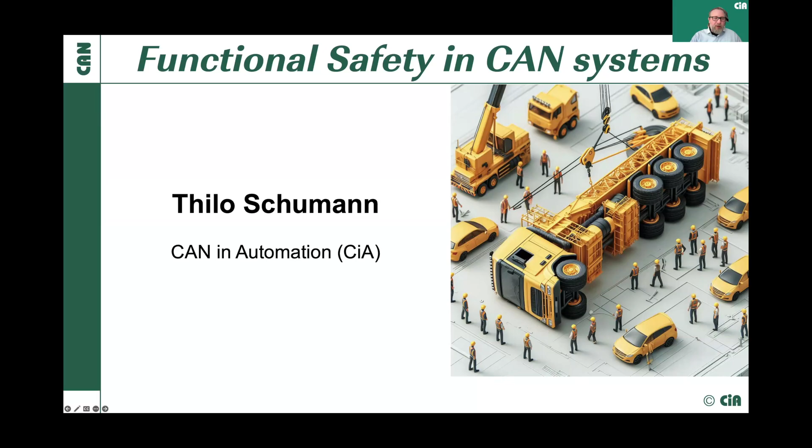I'll try to talk a little bit about functional safety in CAN-based systems, or functional safe communication. I'm working with CAN and CAN in Automation now for over 25 years and was involved in the standardization of many different things related to CAN and CANopen, especially also the CANopen Safety Protocol. And I'm also somehow a little related to the cybersecurity and the stuff Olaf is working on.

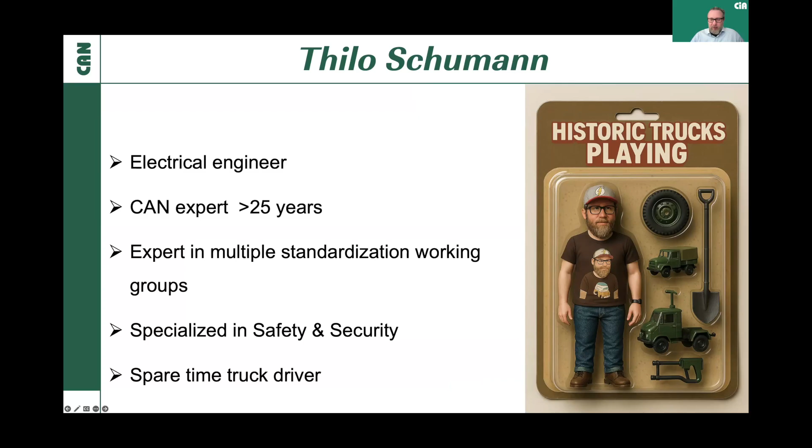But now I want to talk about functional safety. What does functional safety mean? At first, functional safety is a requirement in the European Union, which comes from the EU machine regulation. In the most current version, which is the regulation 2023/1230, which became active in 2023, with an ongoing period to be in full action in 2027.

In general, it is defined here that functional safety in the context of the EU machinery regulation refers to the safety that depends on the correct functioning of a control system. So at first, it's nothing complicated. It just means that it depends on the correct functioning of a control system. So basically, you don't have any bugs in there. And we know we don't have bugs in our system, so we are fine, hopefully. Oh, no. So it's basically to cover the problem that there are maybe failures, bugs, errors, something like that.

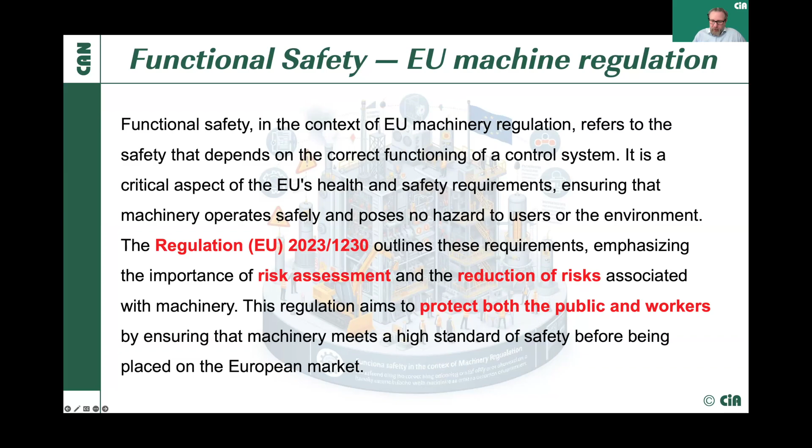And according to the definition, there are some key principles. The key principles of functional safety, particularly in the context of the new machinery regulation, encompass several crucial aspects. The machinery must be designed and constructed with safety as a paramount concern, incorporating necessary safeguards and features to prevent accidents. A thorough risk assessment is essential to identify potential hazards and ensure compliance with health and safety requirements. And the machinery must undergo rigorous testing and certification to verify that it meets established safety standards.

So it's always the same. You need to do a risk assessment, we have to reduce those risks, and we have to show in terms of testing and certification, and prove, that we have done that accordingly to fulfill those requirements. And we are always talking about machinery. I will also come back later to those definitions.

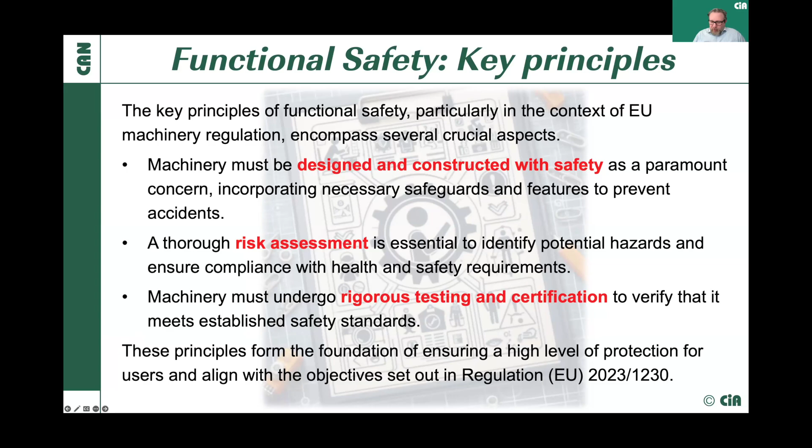Now let's go a little bit into the timeline of how functional safety evolved. Some of you may remember, at least in the European Union, we have had safety requirements established for decades now. One of the first standards to be applied was the EN 954, which was released in 1996. And only a few years later, we started with the development of CANopen Safety, to encourage and allow people to have a standard for applying those safety requirements into their systems and machinery.

Around that time, corresponding specifications were also released by IEC, the more or less well-known 61508 in the first edition, as well as the ISO 13849 in its first edition, which made some general definitions regarding safety requirements and functional safety. Shortly after, we also published CANopen Safety as our standard, CiA 304. And you see in the timeline that then, for some time, nothing really happened.

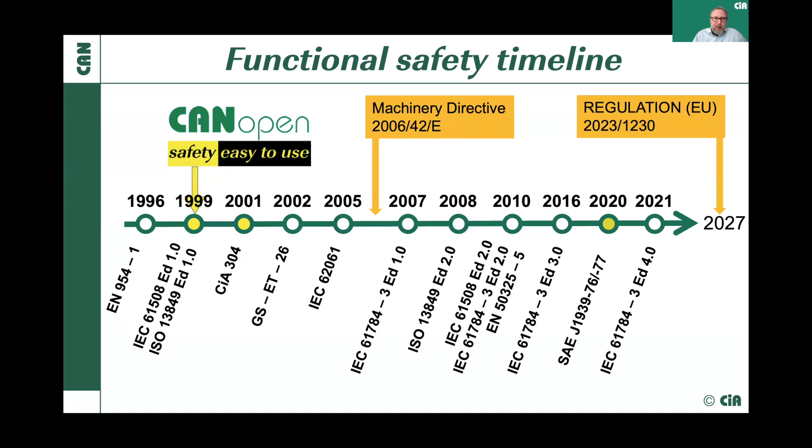So what does all that timeline mean related to CAN? I want to remind you, and we heard that already partly, we have 3 generations of CAN. We have the original CAN, or as we call it, CAN CC, released in 1986. That is what we use for CANopen, for example, or for J1939. We have CAN FD, released in 2012. For that, we have CANopen FD, and also J1939 has a representation and a mapping on CAN FD.

And just a few years back, we also released CAN XL in 2021. So I will now go through all the variations of CAN and what is available today, and talk a little bit about that. So first, here we see the three different frames, and mostly this general structure between those three generations of CAN remains the same, and that was a very important topic. We have a few additions made over time, of course, with the new requirements.

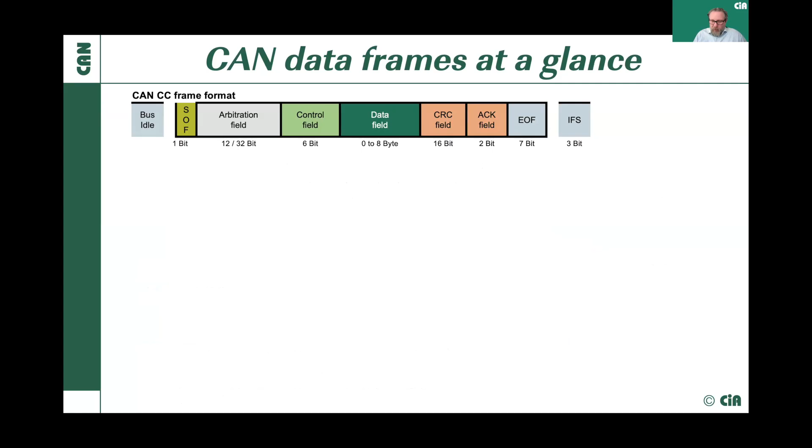And what we see here, and that is also the original idea, it is on the very same network. So we have no repeaters, we have no connected networks and so on. It's a single CAN-based network. And for that, we have, as I said, CANopen Safety defined as a European standard, and we have the SAE J1939 safety.

With a short look into the IEC definition for functional safe communication in industrial networks, IEC 61784-3, this standard lays down the fundamentals of functional safe communication in general in industrial networks, and more or less makes the definition on functional safe communication on what's called black channel. So I have certain repeaters and how all this comes together with the ISO layer.

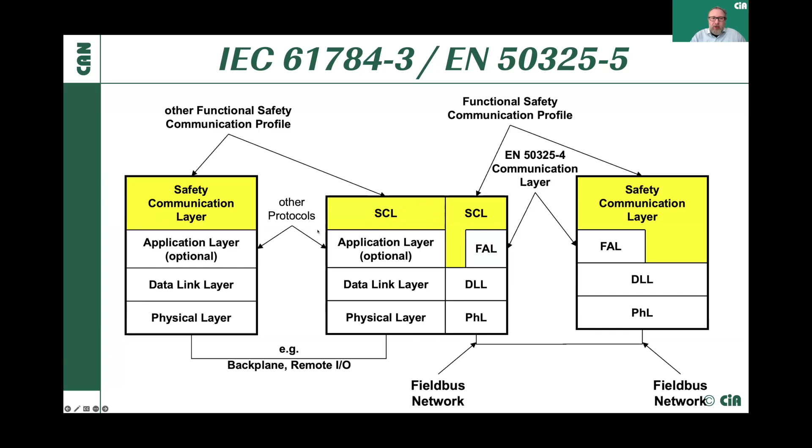If I put CANopen Safety in the mix, as I said already, we don't do it as a black channel network. We do it as what we call a white channel, or you may call it gray channel, because the whole CANopen Safety network needs to be a single network. There are no repeaters, no elements in between the devices that need to communicate with each other. And if we want to make communication possible, we need safety communication which translates from one safety network into another safety network, and the other one may be, of course, CANopen Safety, or maybe J1939 safety, or whatever.

So what were the original requirements for CANopen Safety? And that's why we say white channel, it should utilize the reliability of CAN. As we know, CAN is very reliable and robust. It should be simple in terms of implementation. And as I showed from the original timeline, we started at the end of the 1990s of the last century, and at that time CRC calculation was very expensive. So we tried to find a solution where we don't require additional CRC calculation. And of course, a small footprint, because we want to have a cheap solution.

The final solution for CANopen Safety was that we defined the so-called safety-related data object, SRDO. The SRDO is comprised of two CAN frames, which are transmitted in the CAN network. The first CAN frame contains our original data, and it could be a message between 1 and up to 8 bytes of content.

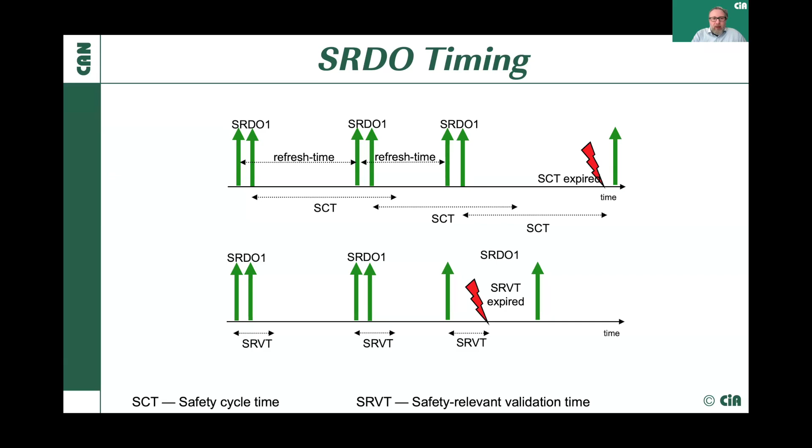That, of course, in terms of CANopen, needs some additional definitions in the object dictionary. In the object dictionary, we need the definitions for the SRDO. That means which CAN IDs are we using, what are the timing requirements and the like. And we also have the definitions of what data we want to transmit, so basically the SRDO mapping. But those are regular definitions that we have used in CANopen for years, and what we call in CANopen normally a PDO. So the SRDO is very similar to a regular PDO.

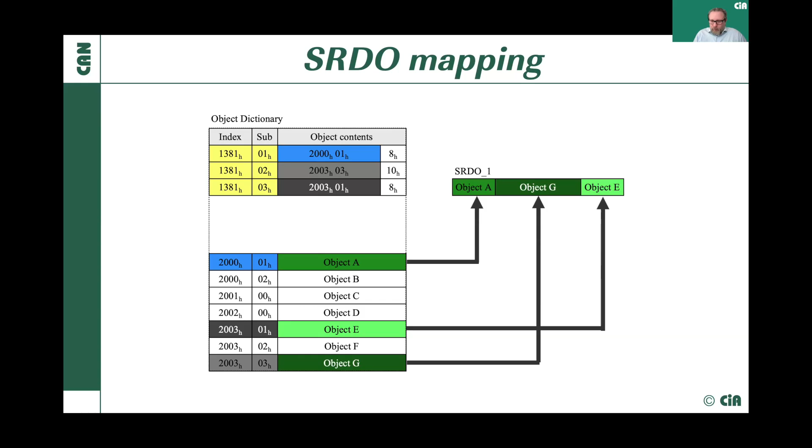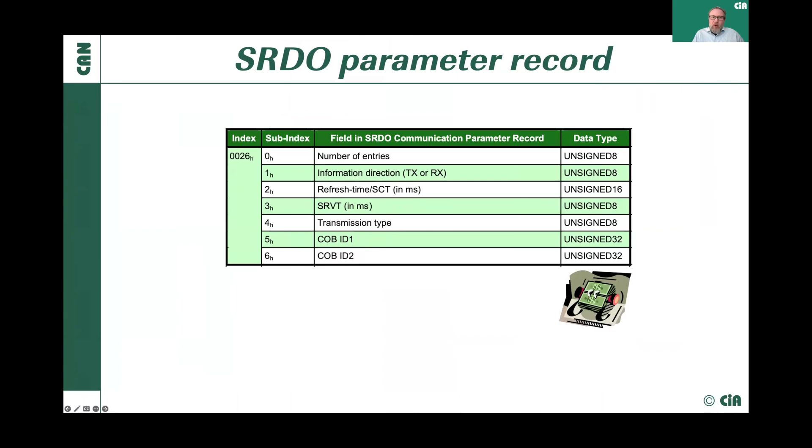And then, of course, the mapping is, as I said, very similar to a PDO in CANopen. So the functional safety is really just the transmission of an additional CAN message. And as I said, the parameter definition means what CAN identifiers are we using for both messages, and what are the timing requirements on the transmitting side and on the receiving side. And with all those definitions, we fulfill all the requirements for transmitting functional safe data.

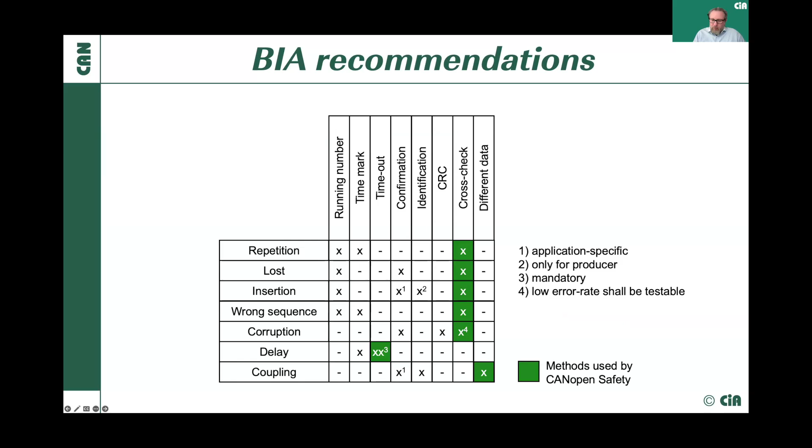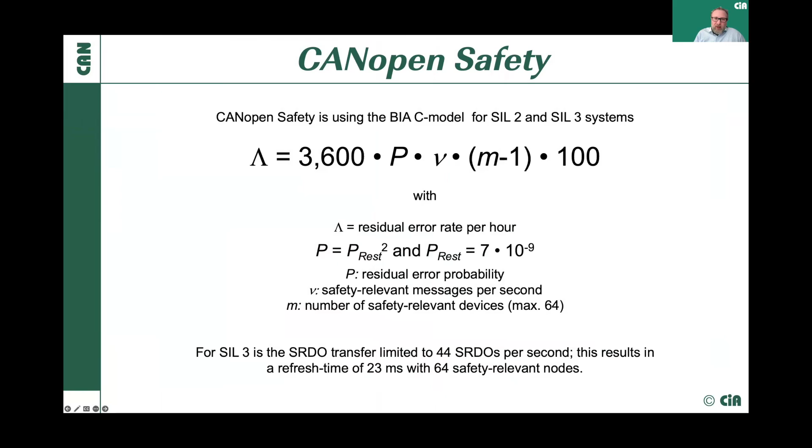The numbers basically prove that it could be used for applications up to safety integrity level 3 systems. And in the past, we also had a reference design based on an old 16-bit microcontroller, pre-ARM Cortex, and it was also pre-certified and could be used for simple sensors and actuators. So that was CANopen Safety, and that is available these days and used in many applications.

What about SAE J1939? If we look at the definition of J1939, more detailed information you can find if you follow the link in the QR code. As you see, the requirements are the same as with CANopen Safety.

Oh, I needed to change something.

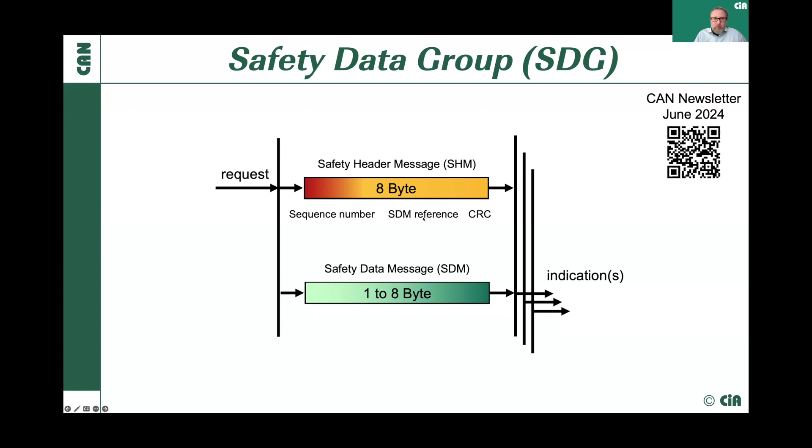And the definitions are very similar. The difference is J1939 uses a so-called safety header message, which is always an 8-byte message, which contains a sequence number, a reference to the safety data message, and an additional CRC. And then the data is transmitted in the safety data message, which basically is a regular PGN. And then in J1939, an additional timing is also added, and the timing is similar to CANopen Safety.

So as you can see, J1939 safety and CANopen Safety are very similar. The only difference is J1939 was developed a little bit later, and adds in the safety message, in the safety header message, a CRC instead of transmitting the original data. But in a sense, it's very similar to CANopen Safety.

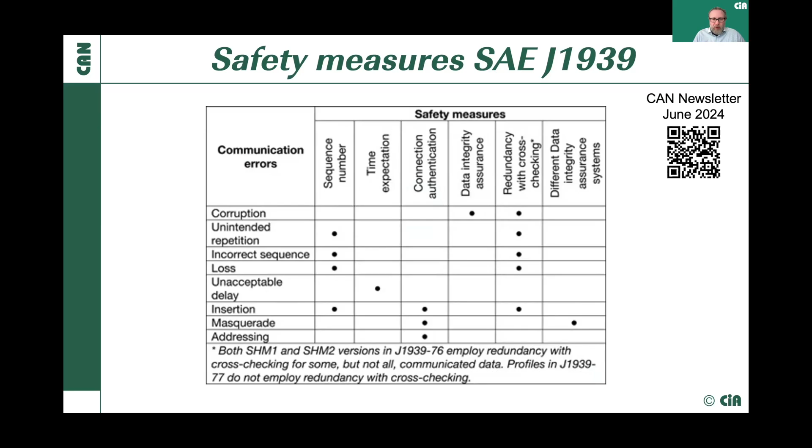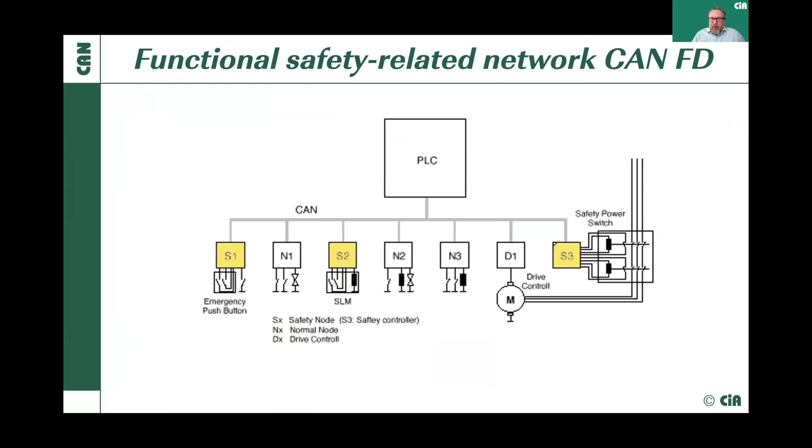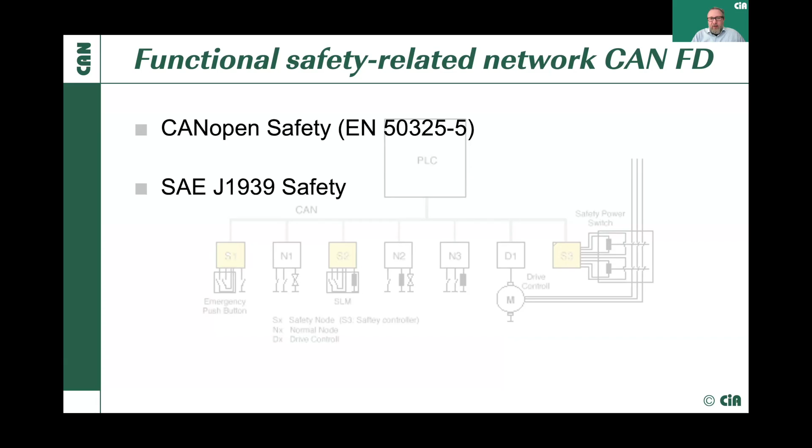Now, if you take a look at the further advancement, what about CAN FD? If we look at a single CAN FD network, of course, as CAN FD can transmit CAN CC messages, we can use the very same protocols. We can use CANopen Safety, and we can use SAE J1939 safety, whatever is applicable for my dedicated application. But we are then still limited to 8-byte messages because we still need to transmit classical CAN messages in the CAN FD network. So we cannot utilize all the new features of CAN FD, like longer frames.

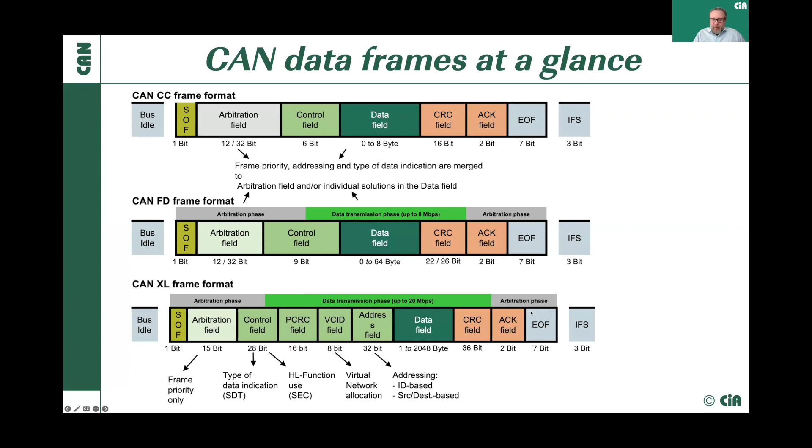And with CAN XL in the mix, we have currently no definition, except that, of course, I can also use my original CAN CC message. So we have currently no dedicated definition for CAN FD and CAN XL, but of course I can use the CAN CC definition.

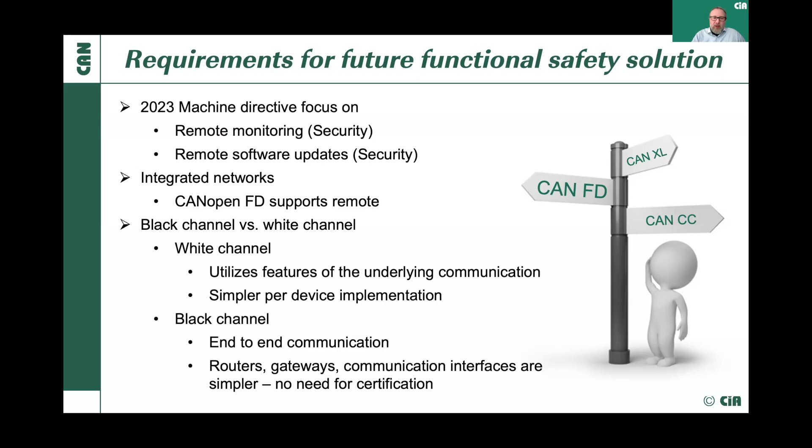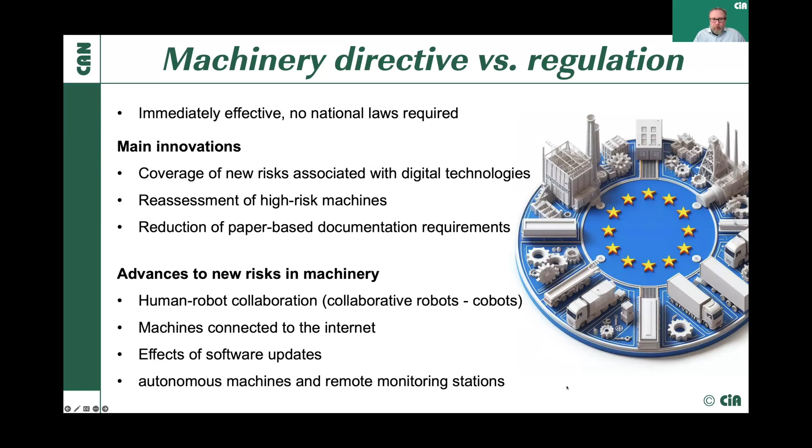What's also included is advances into new types of machinery like human-robot collaboration, or cobots, as it is mainly known. Machines connected to the internet. Effects of software updates, and especially it also integrates autonomous machines and remote monitoring stations. So if we are talking about mobile machinery, then we know autonomous behavior also becomes apparent in mobile machines. And of course, here a special risk assessment is required for such machinery with autonomous behavior.

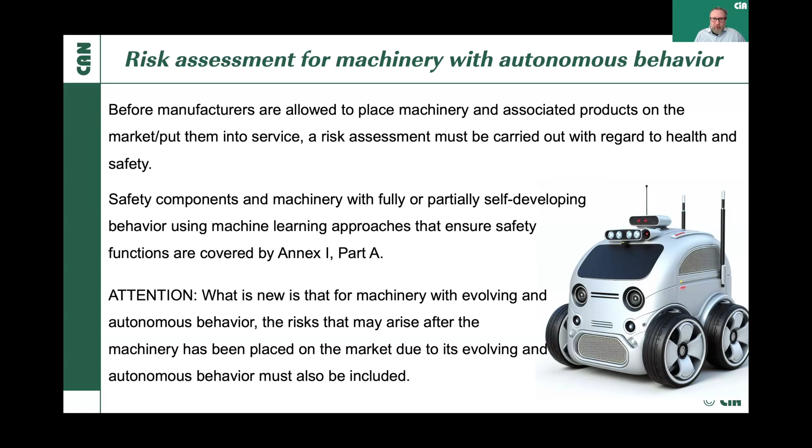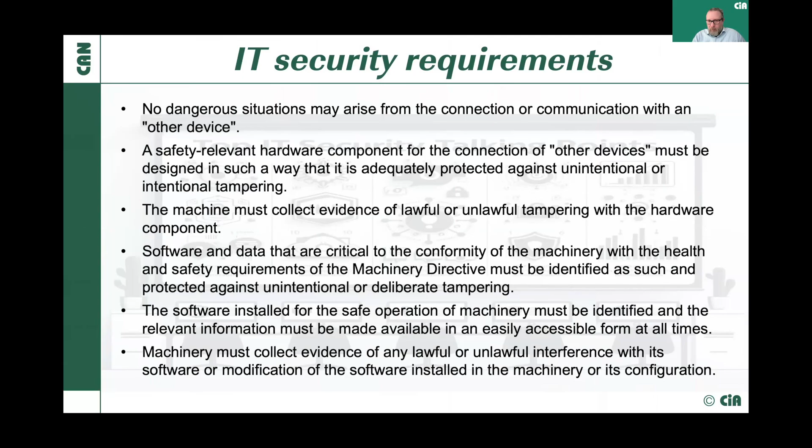And with that, I will come back to my original slide. And with that, I want to encourage people to join our ongoing work on functional safety in the definition of CANopen FD safety, and how to proceed. And we have several discussions going on in our interest group 06, special interest group 01 on functional safety.